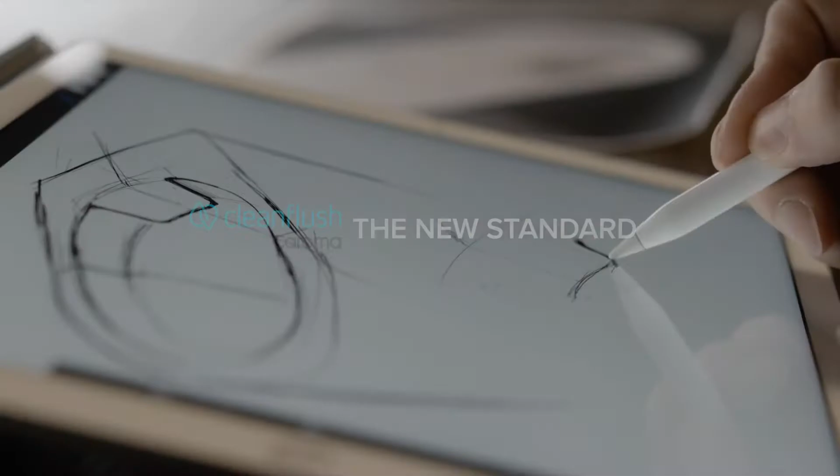We saw the trend coming and recognised it early. In 2013 we saw an increase in the number of manufacturers in rimless technology, and just recently, in 2015, we saw a majority of manufacturers had some form of rimless flushing technology.

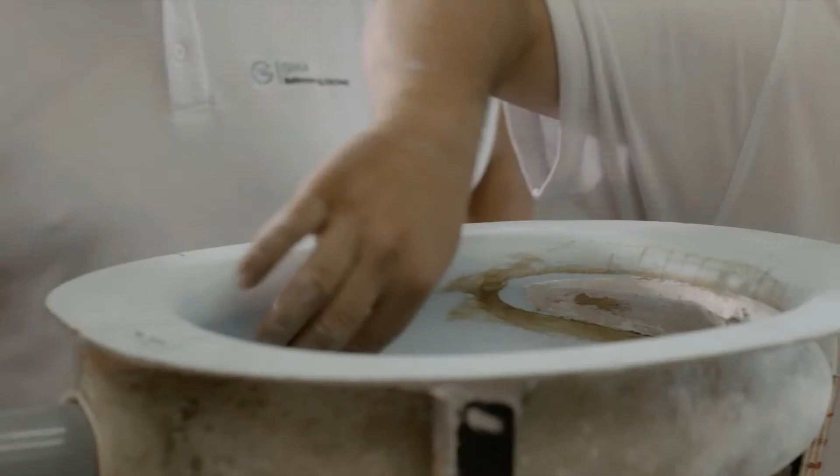When we looked at what we could do in rimless, there were a number of options we could have taken. We knew we had to do a lot of work to bring it in line with our original SmartFlush and performance platform. And to do that, we had to learn all the parameters around making that rimless toilet flush effectively.

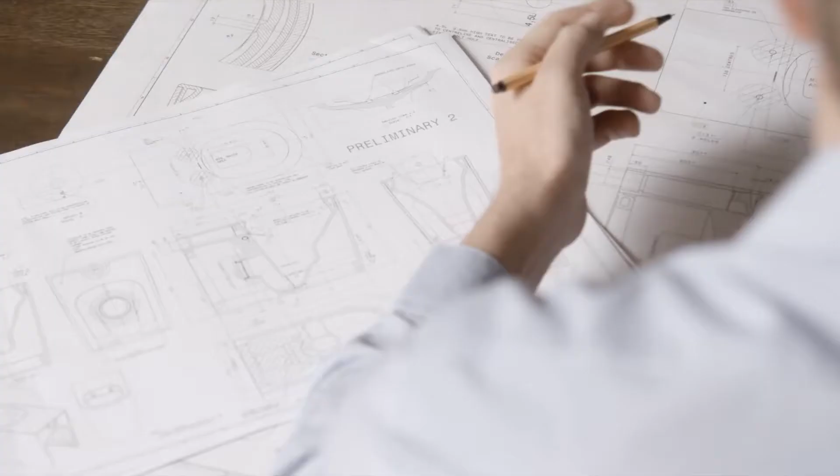It was pretty immediate to see what the benefits to the consumer were going to be. There was a clear message there as far as hygiene and the ease of cleaning the product. What we saw in some of those early companies to adopt the technology was that they weren't really functioning as well as a standard box rim pan.

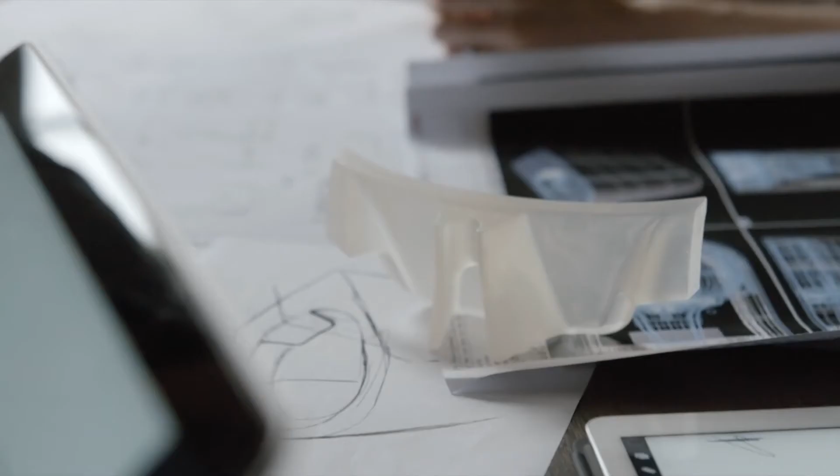The performance criteria for a lot of those European pans just isn't as high as ours. The water coming into the pan wasn't coming with as much force. We saw quite clearly that if it was to be implemented in Australia, we had to take it a lot further.

When I first start a project like this, my first question to Steve is, okay, what do you want? How do you want it to perform? What do you want to compare it to? All these questions have to be asked up front, because at the end of the day, you want to hit a mark, but you need to know what that mark is.

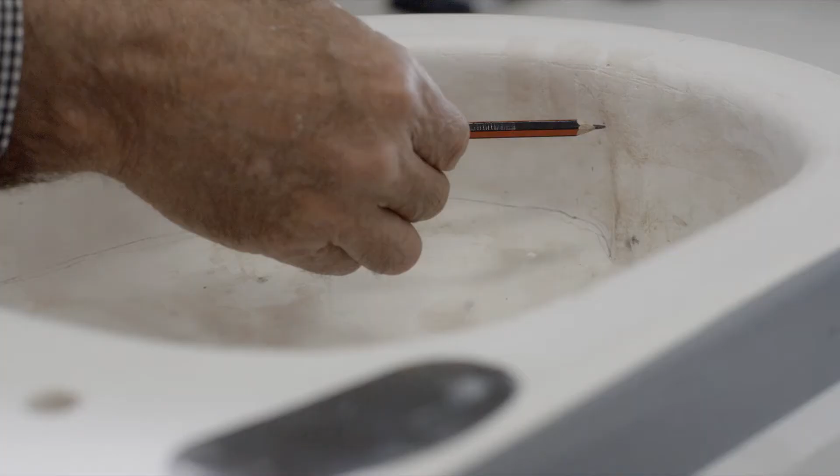We could have gone with a design with a half-closed rim, but Steve said, no, I want the design which is fully opened. The purpose of that is it's more hygienically clean, you can clean the whole bowl down, you've got nowhere for bacteria to stay. That was really challenging because the water in a rim reacts one way. The water in the Cleanflush, which has no rim at all, reacts completely differently. But you still have to make it pass the standards, so that was difficult.

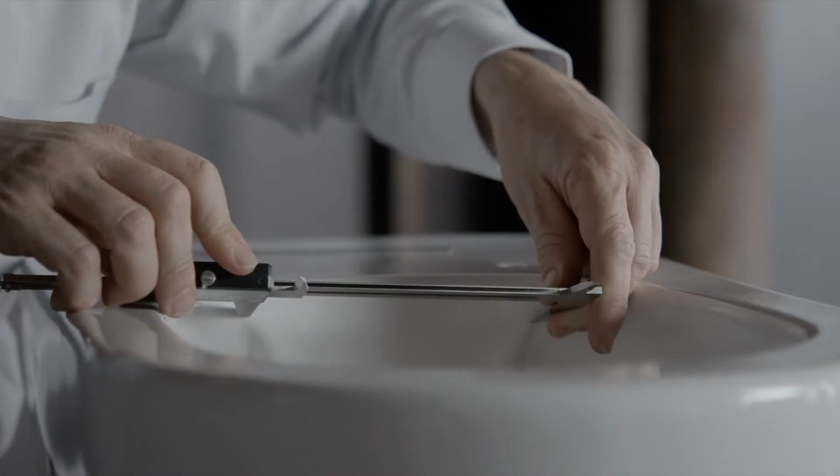Steve's always maintained a high criteria for any development, and it always makes the job harder, but we end up with a better result at the end. It was noted that quite a few of the competitive products had a low water height, which meant that there was a fair distance which was unwashed on the bowl rim. With the Caroma design, we lifted that water level up so that we were washing down more of the bowl surface, ensuring we got a cleaner flush.

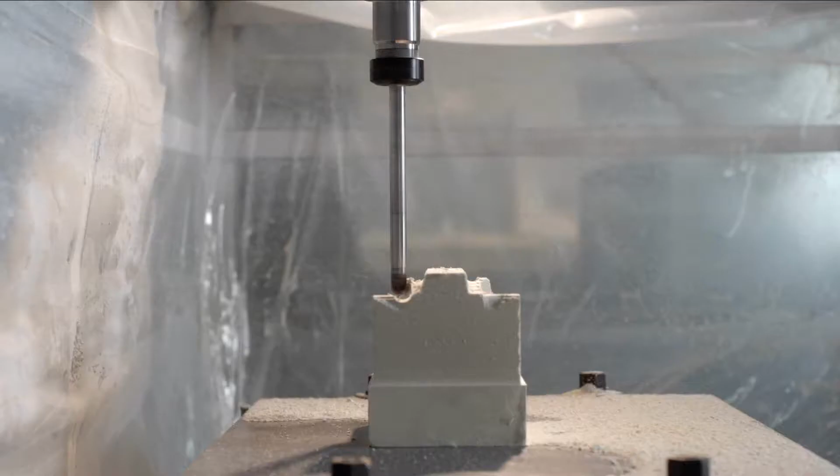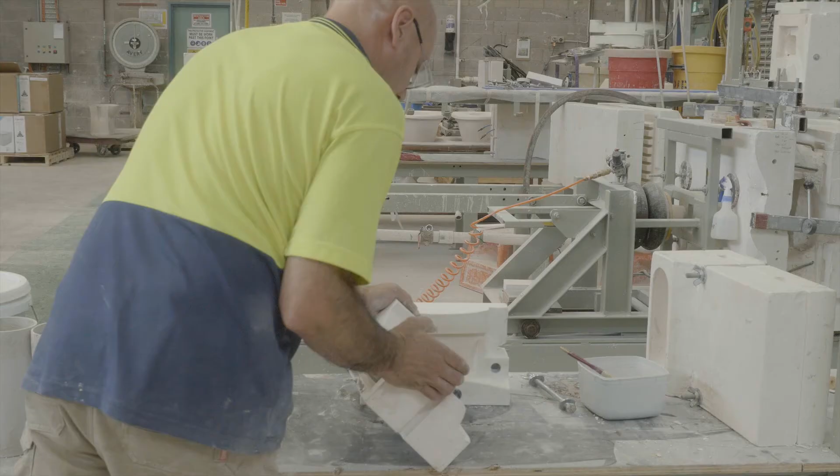So we went from prototypes built on our rapid prototyping machine, which were nice and consistent, the same size every time, to moving into ceramic, which had variability just as part of the manufacturing process. That was the key thing for us, to make sure that we had a consistent flush. We got pretty good early results.

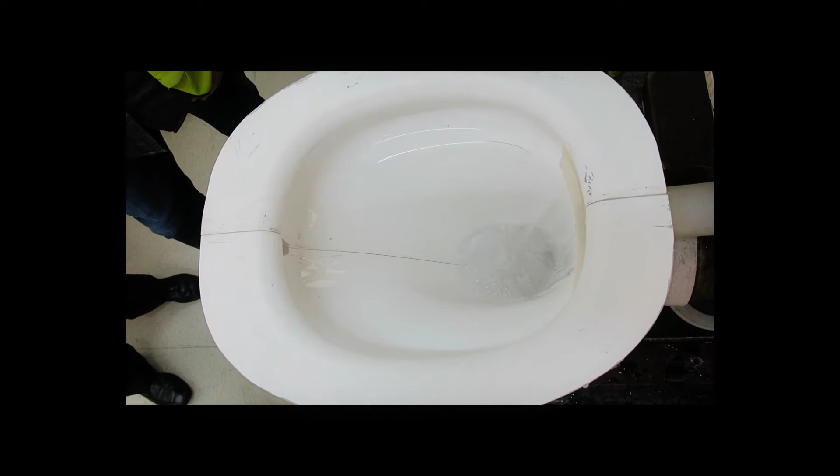One issue we had was that we couldn't accurately control the water in the front of the bowl. And if you don't control the water accurately at the front, then you've got issues with the performance of the pan flushing and clearing waste, because you're not directing the water where it should be going. That's why we spent so much time getting it right in the laboratory. There was no shortcut with this product.

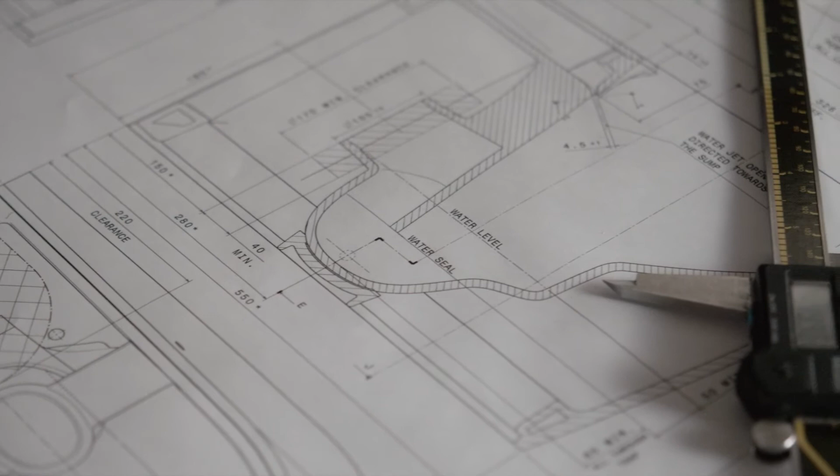To get it to function properly, we had to learn a lot along the way and really put a lot of energy into understanding and controlling that water. By adding extra force into our flush, we had to rethink some of the fundamentals of that technology to get it to function a bit better. Our team was quite instrumental in developing the bump at the front of the product, which is where our patent on that technology now lies.

To get the performance and consistency we wanted, we had to put the flow balancer at the front of the pan. What it allowed is when the water collided, it hit the groove first before it hit itself, and then allowed the water to balance itself out, so that it always hit in the same position in the sump area.

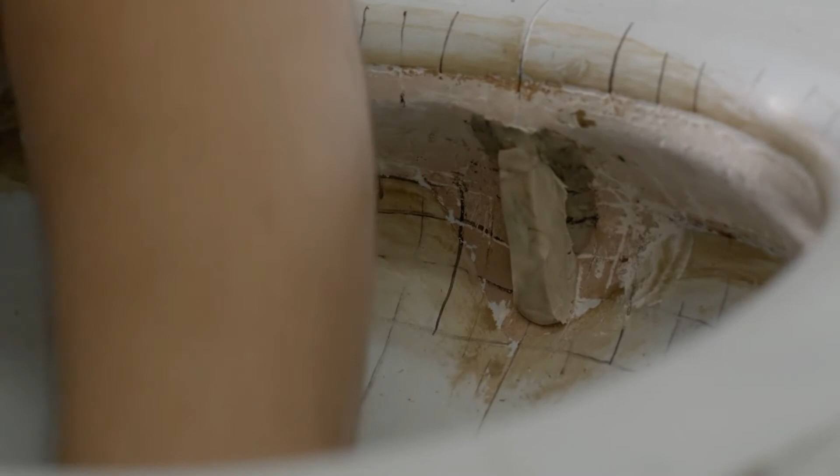I think the beauty of what we've done here is this very simple solution, but very difficult to achieve. It was a very rewarding solution, this one, because it was the light bulb moment when we got it, and then we were able to refine it and get it better.

We had great technology here, and we wanted to make this better than SmartFlush if we could. So I think we've achieved that. Cleanflush is the next step. It's the next generation. The days of rims are numbered, I think. We're going to move into the next generation of products, and this is going to lead it in toilets.